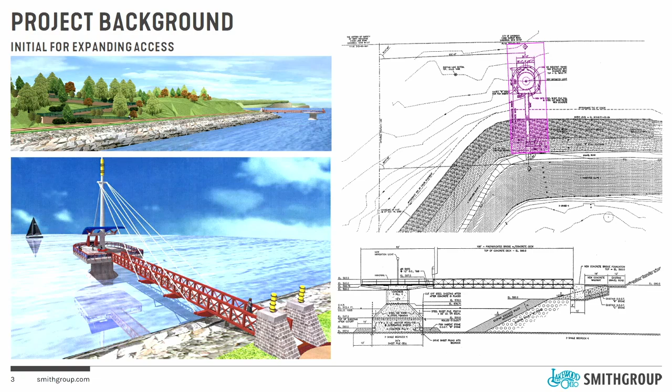So we tested a bunch of different ideas. You have a bunch of stuff out there, and what needs to work has to work with it and improve upon it. You don't want to throw everything out - you can't start over.

In the top image, you see the Solstice steps - much loved, much visited. I think 200 to 400,000 people a year come here for this great thing, to look at the sun going down, which is heartwarming. There's a sunrise component too, which we'll talk about in a bit.

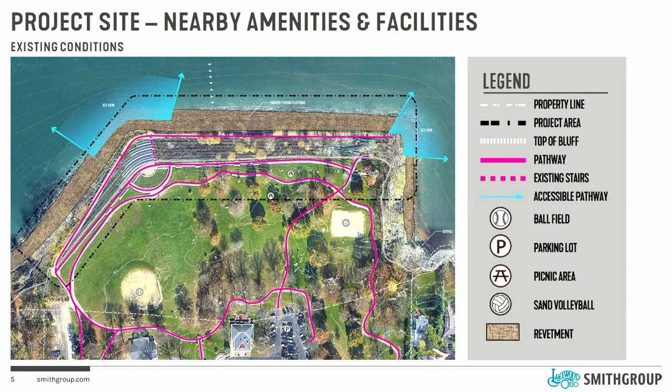So I represent a lot of really cool nerd folks, which I consider myself part of, that are into coastal processes. If you're not a numerically nerdy type person but you've actually been out here, you know there's big old waves that come to this location. From the west is the predominant direction, and they're big. If I look at that west side, you probably have a 9-foot wave climate that hits those concrete armor units and splashes. You do have a less frequent but still pretty significant wave out of the northeast that occasionally happens in the winter, when you may or may not have ice. We had no ice, of course, and that's pretty significant too.

So when people talk about access, about getting stuff over the water or toes in the water, we have to think about safety. We have to think about longevity and the improvements, as illustrated by the former fishing platform. So we'll try to balance getting toes in the water and getting out over it with something that can be long-lived and withstand the harsh conditions you actually experience here.

So first meeting, this is now 18 months ago, or 10 months ago in my mind. The first question was, what is this thing? Are we trying to build a pier that goes out perpendicular to the shoreline, or are we just trying to add some more seating? And then, are you modern, or not? What kind of aesthetic do you want? A lot of this was focused on aesthetics, what kind of material choices. Overwhelmingly, what we heard was it needs to be natural, natural materials, not contemporary in design.

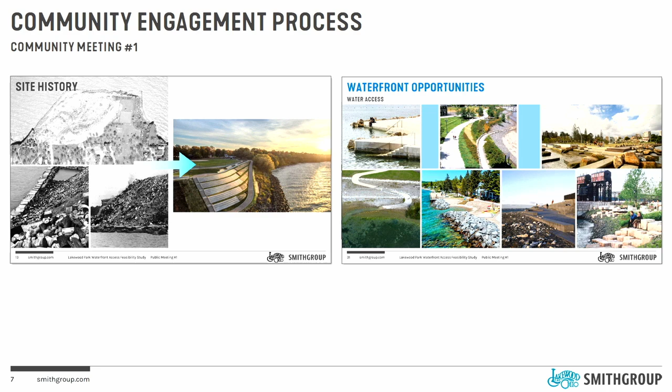And so the magenta stuff that matches Michelle's coat, there's a synergy there, sort of the highlight of things. Out of 1,000 responses to the survey, which is hefty, by the way, good for you guys, people said make sure the top of the bluff and the bottom of the bluff are connected better than they are today. I heard things like make sure it's fully accessible, meaning universally accessible, whether you broke your leg or you're 90, or in a wheelchair or anything like that. Water access was critical, and then providing additional places and spaces where people could sit and linger. That was what we heard a lot of.

And I highlight this access thing because it was number one. What is access? Man, I don't know, we'll talk about that. So we had a survey after that had a lot of good feedback, and that bottom comment is mine: what is access? I remember the whole design team was like, what are we trying to do here? I'm not sure yet. So we had to test that with three different ideas.

So second meeting, we come and present three ideas, and people hate some of them. I mean, that's how this is supposed to work, we're testing different divergent ideas. That's the whole premise. Tell me we're stupid, go for it. That's where we're supposed to be. I can be completely ignorant at this point.

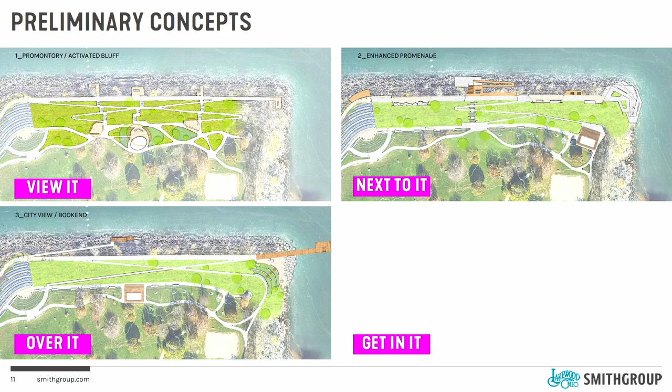So the upper left one is like building at the top of the bluff, exploring the idea of proximity, but not access, more visual access. Then we've got the upper right one, which is doing stuff next to it, extending out over the stone or concrete that's along the water, but not pushing out over the water. And then this third one, we're just going to go out over the water. So I summarize it this way: view it, next to it, over it, and then the magenta down on the right-hand side is what we heard, which was get in it.

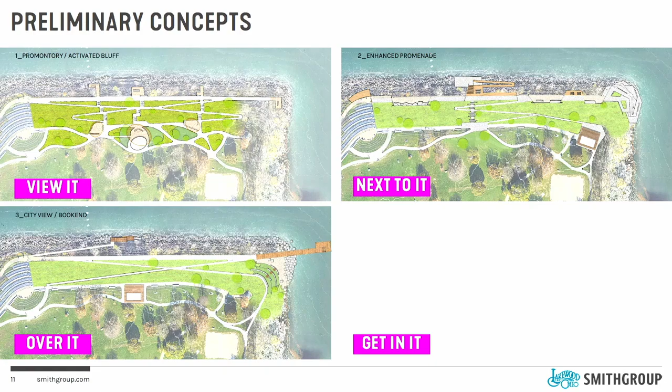So now we're trying to define this, the whole design team's looking at it and saying, well, we thought we were just signing up for a pier. And now we're putting people in the water, in a 9-foot wave climate. We've got to think about how we do this. So that sent us all back to the drawing board a little bit.

What was good, though, is after that initial second meeting, we had more participation in a virtual setting. We had a bunch of people who commented on things, but the comments are similar to last time. They talk about top to bottom access and universal accessibility, but they did say some really important things that highlight where these concepts, or the concept that we call the preferred concept, kind of comes from or evolves from.

Over the water, important. Okay, I heard that, and that's kind of what the bottom one is. That was heavily preferred, not just at the public meeting, but actually as a follow-up to that. People really liked that idea. We heard a really strong contingency of like, I'd like to fish. Again, I'm not going to debate that. That's a policy thing.

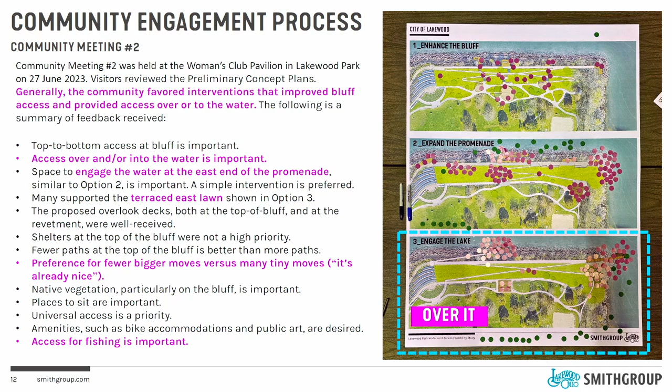But it does have implications on permits, so I will touch on that in a second. The other thing we heard was like, this place is great already. Let's make fewer, bigger moves and not sprinkle something everywhere. And so I think that's what we heard, and so you'll see the investments are in a couple key areas, right?

The little fishy down at the bottom. So I said we'd come back to that. So filling in the lake for, let's say, a football stadium, just theoretically, probably not something you could do today. Okay, you can build that anywhere, right? Filling in the lake because I want to create a trail, maybe.

In general, when I look at permitting from a state and federal level, they're going to look at one of the keys that I can use for getting things approved as a permit is fishing. So in Euclid's case, it's a fishing pier. Now, Tim and a few of the guys fish at like 10 o'clock at night, which you're not supposed to do, but during the day, it's probably not heavy fishing. And so the question is, there's a management piece that you guys kind of have to decide as you move forward, but I think it also goes to how we justify investments that fill in along the lake edge too.

So things that we can debate as we move forward with regulatory agencies, but at least sort of understand that that's one of the pieces we'll have to sort of walk a line on, right?

Okay, so this is why we're here, right? It's the fun of like, well, you gave us a bunch of feedback and you didn't listen to me in this particular area, and okay, I won and I got what I wanted, and I have a direct staircase down. No, I don't have a direct staircase all the way down. I have a half staircase, right? So there's like, we're all going to find bits and pieces of things that we love, and bits and pieces of things that we hate.

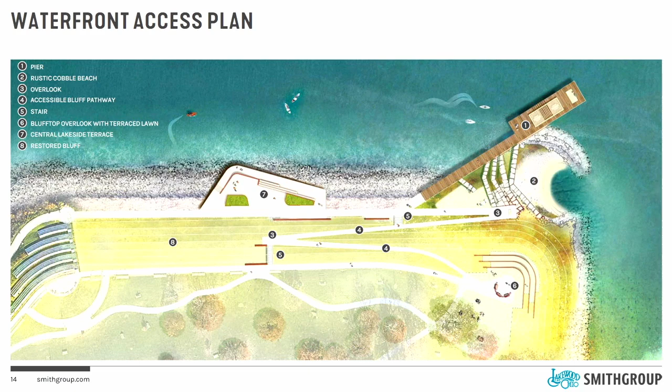Then the other bold move here is this access—a replacement for that switchback that provides a truly ADA accessible walkway down there. And then we have a stair component to that, which could go all the way down or not; we're showing it stopping midway. There are some reasons for that, which I can talk about around the table.

Okay, some more images—less talking, more images. The upper ones are pulled directly from the model; they're not post-processed, meaning they're not prettied up. It just helps you understand what it could look like.

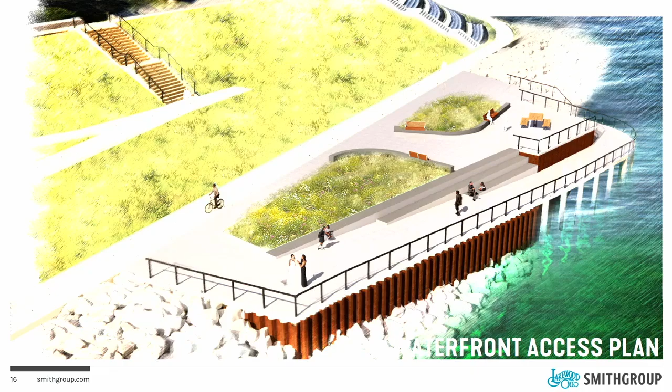That's the central area, right? On the right-hand side, where the lady in the white dress is, that ramps down and wraps around the corner, and then you have stairs that come down to that lower platform.

Again, the vegetation could actually be trees in there, ornamental trees or shade, whatever you want. We have some seating edges, but we have two different levels there because we have some fall we can work with, but yet keep that deck and railing high enough that when the ice hits it, it survives.

Just a couple other views of the pier and that cobble beach area, just showing you what it is.

What is the shelter? How big should it be? Should it be pink, purple, polka dot? I don't care. Those are details that we can work through. How big should it be? What's the material? All things that we can work through.

But again, the idea is that when you're out on that pier looking at the sunrise, or maybe it's later in the day and you happen to be fishing, you have a place to get out of the sun. That's just an opportunity to provide that. So whatever the right scale is, we can work through those types of details.

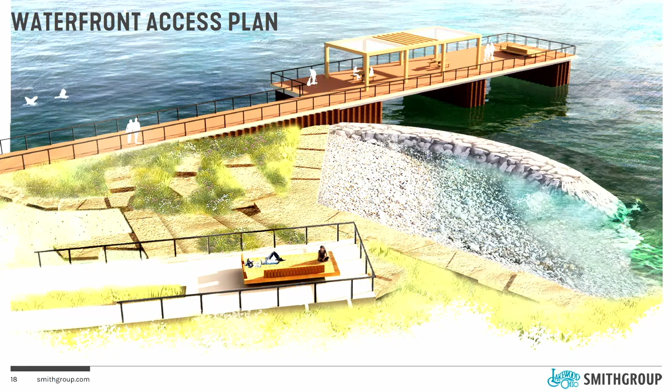There's that cobble beach we talked about on the right-hand side, protected from the predominant wave direction out of the northwest and west. Jason, can you expand on that? I've had at least 10 people ask questions about what are the wave heights, where is it coming from, why is that specifically there. I think enough people asked that question that it might be worth explaining.

All right, nerd out for a second with me. The length and the number of these, the size of that, tells you the frequency of the event occurring.

The waves and the wind primarily come from the west. That's also where sediment transport and sand moves, but neither here nor there. But it's nearly twice the size of what comes out of the northeast in terms of frequency, meaning the bigger bars.

The red and that burgundy color, sure. You can see there's a lot more of the orange, red, burgundy, which are the highest waves. They're coming out of the west.

And so I have a huge wave smacking that west face of the concrete units. And so we're trying to find a space and a place where we can actually provide enough shelter that we can have a cobble beach and have some level of access, because this is a tough investment.

Like if I wanted to actually create a beach on the west side, which could be done, I would probably have to create an offshore barrier island to do that. And that comes with a massive investment, like say $4 million.

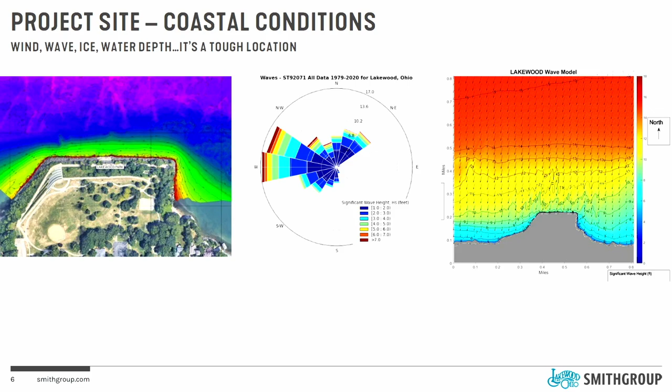So that's why we're doing that, and that's why it's there, because from a coastal perspective, that's kind of a technical dealio. Yep.

Okay, so beyond tonight, where do we head? So implementation—Sean talked about the capital improvement plan. There's funds that can help advance this. We're talking with the city about this. The city is very good at getting outside resources and funds to move forward with a project like this.

This is the end of this initial process and the beginning potentially of another process where you all should stay involved. You will have—is that pink, purple polka dot, is the stair goes all the way through there? Are we going to take out all the trees, or are we not going to? That's all detailed design decisions, but we're getting the framework that works.

And so you're going to move through what's called design development. It's basically, let's say, 50%-ish plans. It's what you submit for permit drawings to regulatory agencies, Army Corps of Engineers, Department of Natural Resources, all those fun things. I won't even get into leases, which I refer to here, because that's just goofy, and we don't need to talk about that tonight.

But the idea is that you have to get from basically what we would call a plan tonight, from 0 to 50%, so that you can submit it for permits. And then you got to finish the design and engineering and go out to bid and hopefully get a good bid from a contractor who can actually do it in a reasonable time frame, unlike, say, Bradstreet's Landing, if any of you were there. Okay, that was painful for everybody.